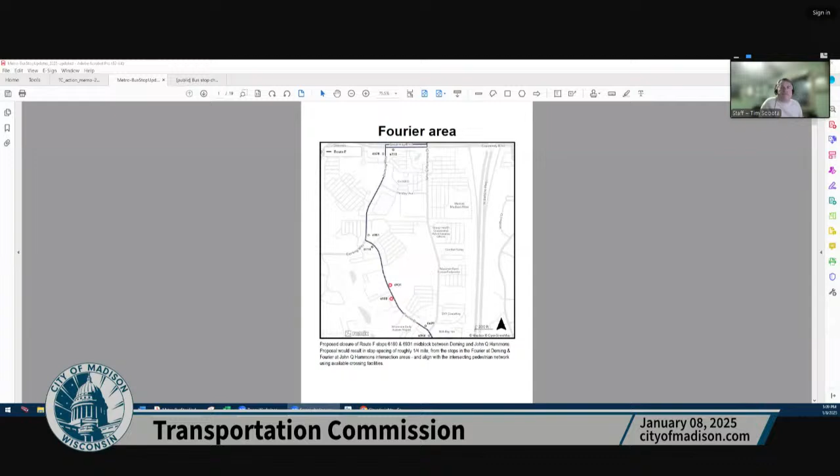So if I am now sharing a screen, just as confirmation... it's really small, Tim. Yeah, if you can do full screen instead of showing, because we see all the border of your computer screen. All right, I'll try one more time. Yeah, it's really tiny, very hard to see. Let me try one thing. I'm sorry, bear with me here. No problem, just going to do some internal rearranging on my screen.

All right, if I've swapped that, bear with me here. Is this getting any better? No, I think what you want is the slideshow option. Thank you, I think it's on the bottom. Not sure, but... oh, on the Zoom itself? Yeah. Thanks for the tips, Robbie. Thank you.

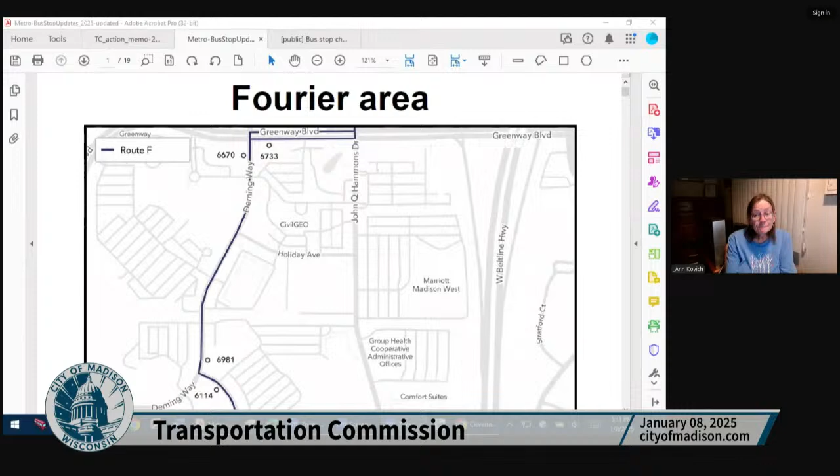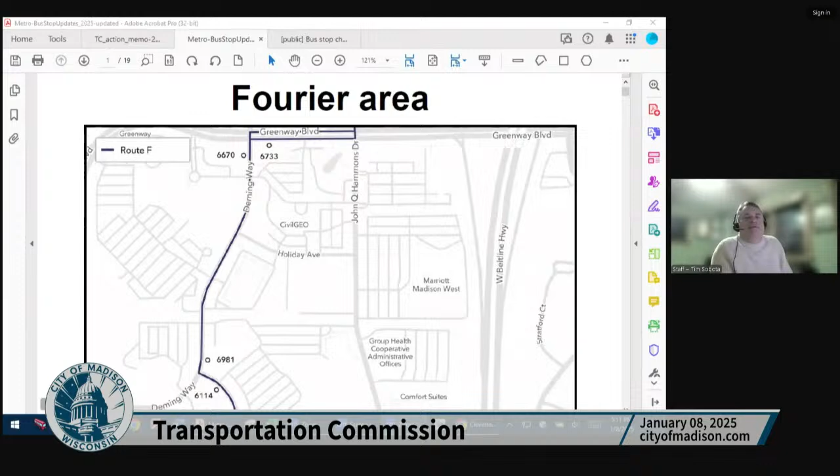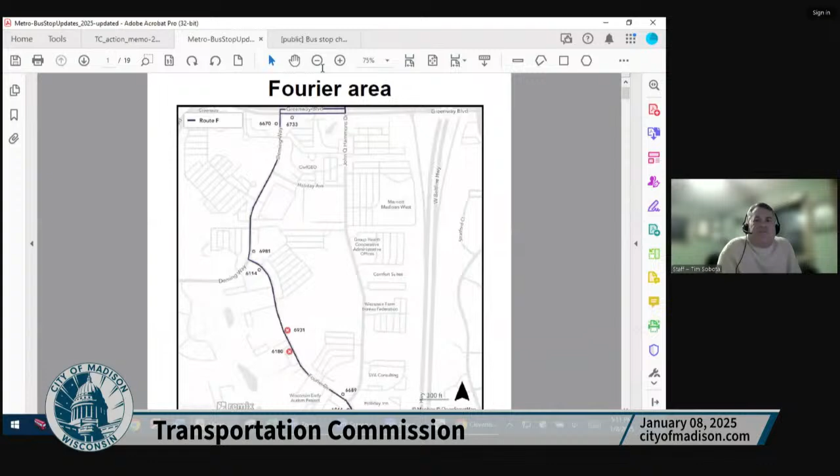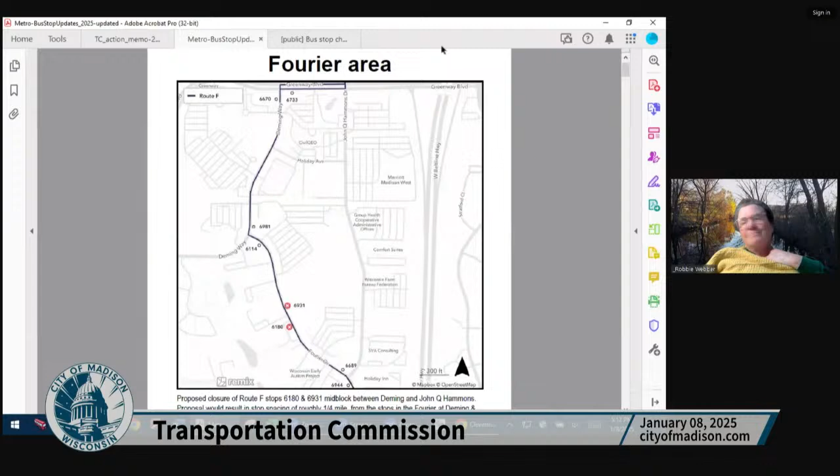Getting that. Now it's too big. All right, so if I back up a little bit, get this out of the way. Is this closer? Absent the stuff on the side and the top, is this going to be good enough for government work? I apologize. Yeah, it's just much more useful for presenters if they present just the slides and not their whole desktop. Understood, yeah. And this is sharing the screen. I've got two monitors here, but I apologize.

So I guess what I'll be doing is going through these overview maps from the packet. Starting on the far west side, this is Route F in the Old Sauk Trails Business Park. On Fourier Drive specifically, there was historically a pair of stops between the Deming Way and John Q. Hammonds intersections, with undeveloped land to the right and some single-story buildings to the left. The proposal is to eliminate those existing stops in the middle of the block that don't have an accessible pedestrian crossing between them, while maintaining the existing wheelchair-accessible bus stops with accessible curb ramps at the John Q. Hammonds and Deming Way intersections.

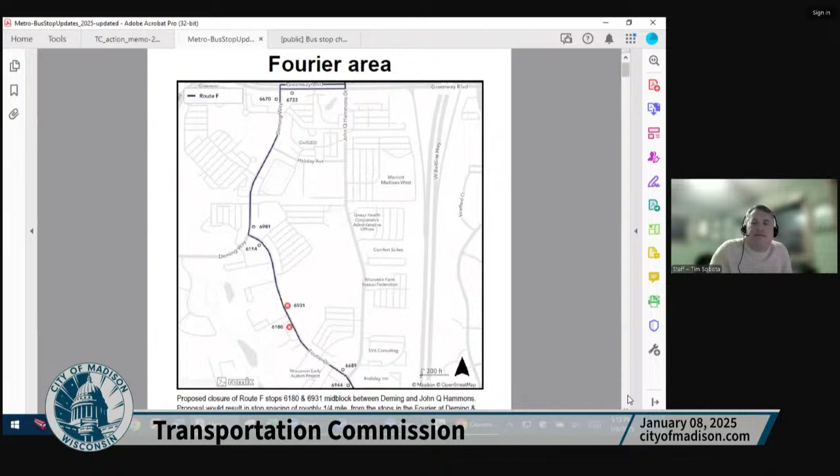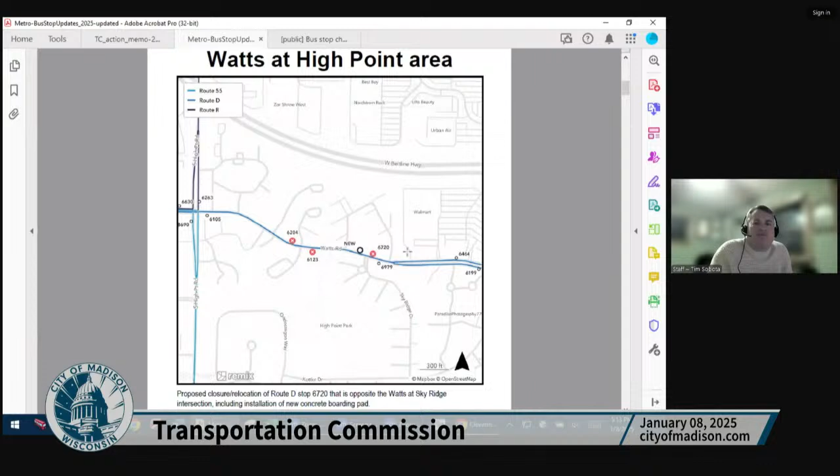I will proceed forward unless I hear otherwise. This is out in the Watts at High Point area, two different things. First, there's a pair of stops at the intersection of private driveways proposed for elimination, mainly because there are no existing curb ramps or marked crosswalk across the 4 lanes of traffic there. The other change is taking an existing bus stop immediately adjacent to a curb ramp and moving it a bus length beyond that curb ramp and crosswalk, to get the bus out of the crosswalk and open up better visibility at that pedestrian crossing where a stopped bus would otherwise obstruct visibility of the crosswalk or vehicles driving in either direction.

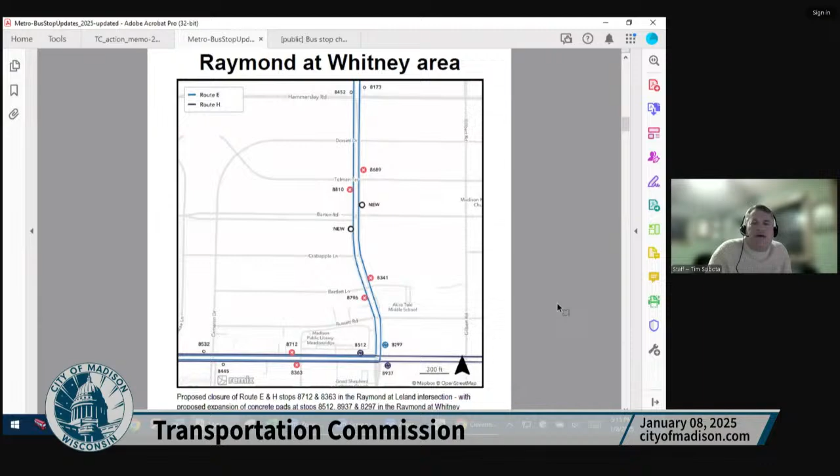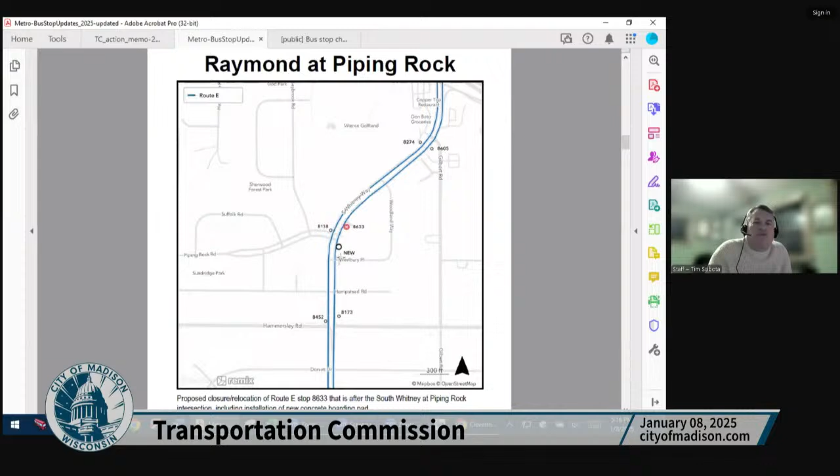At Raymond and Piping Rock, there's an existing stop north of the Piping Rock Road intersection, but it's right on the curve. It's somewhat of a blind bus stop, where the bus stops curbside while traffic is coming around that corner. From a safety perspective, we're proposing to move it before the Piping Rock intersection, about 20 feet before a pedestrian crossing there, setting it back from the crosswalk for visibility, while putting it where oncoming traffic will have a better view of the bus signaling to pull curbside to load and unload.

Reetz Road is somewhat similar to Whitney Way. Here's Raymond Road to the south and Hammersley Road to the north. With 2 sets of stops currently, we're proposing to realign those into a single location midway between Raymond and Hammersley, at the Knox Lane intersection.

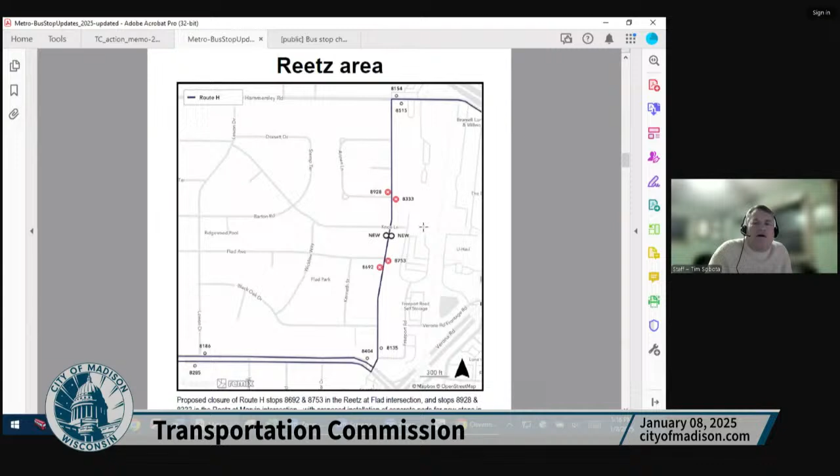Knox continues to provide westerly access into the neighborhood. There are no streets to the east of Reetz into the back of the Home Depot area there.

In the Allied Drive area, proposing to put the Route D stops on the side streets of Allied Drive, creating a new stop opposite the one on Lovell, and putting two new stops on Jenewein just immediately east of Allied Drive. That would eliminate the stops on Allied Drive, where the bus currently stops between the curb and a center median, blocking the directional travel lane. Moving those onto the side streets gets the buses off Allied Drive itself, where they're not impacting traffic and visibility.

The other one is kind of a private development change, but it is going in from an illustrative point: the McDonald's at the corner of Red Arrow and the Verona Road Frontage Road is reconstructing their driveway approaches, which will impact the existing stop on Red Arrow. But they're closing the driveway on the frontage road, which created an opportunity to put a bus stop there and also get a pad in for a potential shelter installation in that piece of right-of-way that will be reconstructed from driveway approach into standard sidewalk and terrace as part of that private development contract.

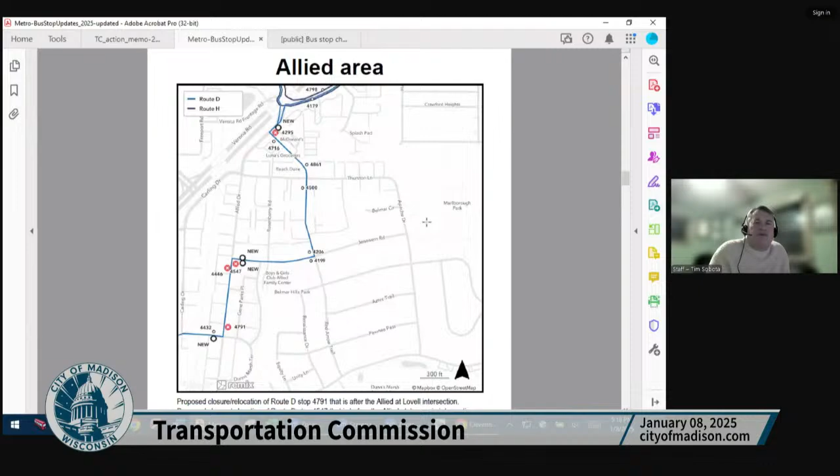Mineral Point near Speedway — this is a bus stop spacing proposal. This is the Glenway signalized intersection right here, and Westmorland Boulevard is the crosswalk by the Midtown Police Station. The proposal is to eliminate the stops the short block east at the Toepfer intersection, so spacing would go from Glenway down to Westmorland and so on.

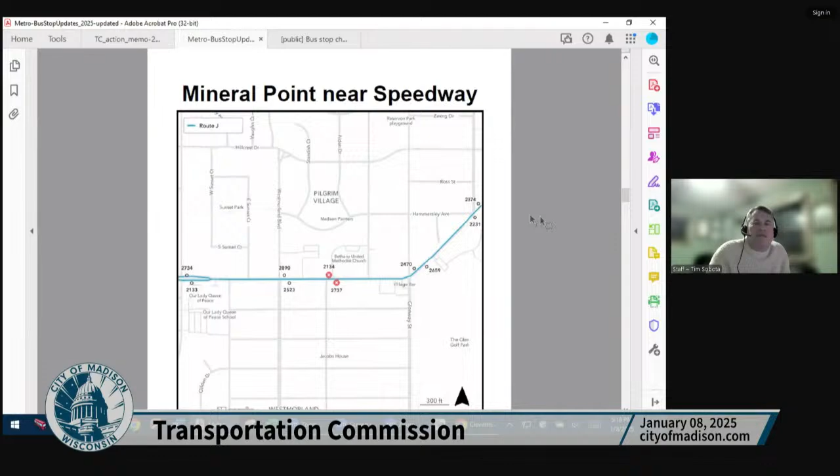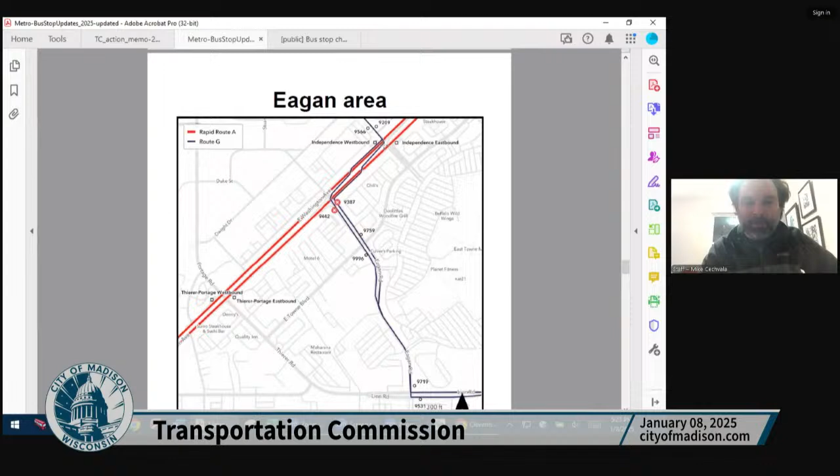With BRT construction and transit network redesign, these were always intended to be temporary. Before BRT, we did not have a traffic signal at Independence, so to accommodate transfers between the G and the A, we had to have that stop down at Eagan. But now that the signal's in, it's not really needed for that, and Route A doesn't stop there anymore, so it's not serving its purpose anymore. Sorry, I just thought I'd add that detail. Thank you.

The next series are related to Route B in North Madison. There is a new proposed overhead charger looking to be installed on the north side of Northport, the westbound travel side of the road west of Kennedy. Currently, Route B goes clockwise, west on Troy, north through Central Wisconsin Center, and east on Northport. If that overhead charger goes in there, that would require Route B to go in the opposite direction, westbound on Northport, around Central Wisconsin Center, and east on Troy. This is illustrating where that overhead charger with a bus stop would be planned for the B going westbound.

The next stop anticipated is on Knutson, across from the entrance of Central Wisconsin Center, proposed for installation with the city's Knutson project. Another stop is on Green Avenue, generally opposite the second entrance to Central Wisconsin Center. Proceeding from there, the stop currently opposite the state of Wisconsin facility, which does not have pedestrian access in that drive aisle, is relocated to the south side of the road where the bus would stop curbside at their entrance where there is pedestrian access into the facility. From there, proceeding east, the stop by Troy Gardens would be kitty corner across the way.

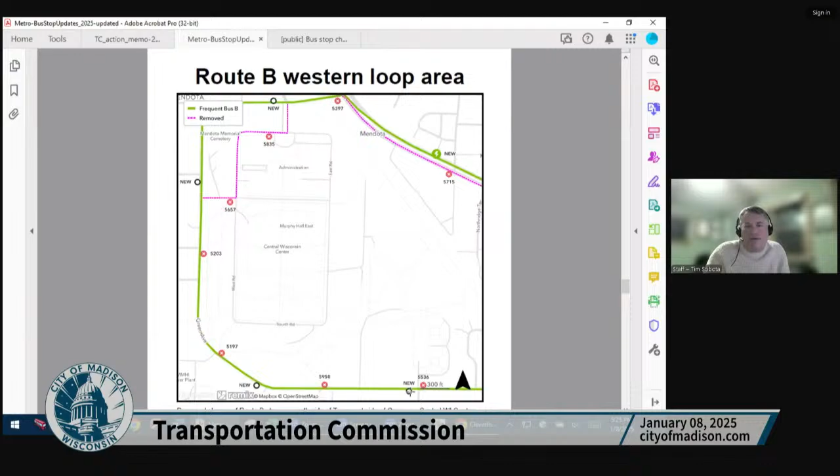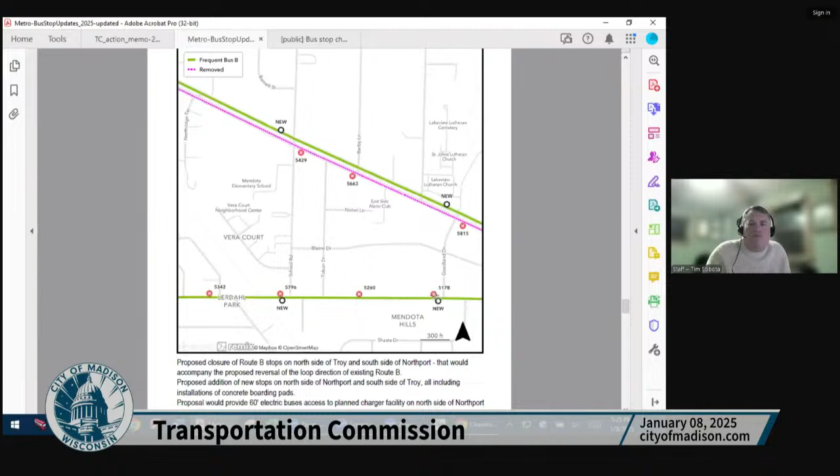Scrolling down, it gets bifurcated, but again, if the B is going westbound, this is Goodland Drive, and this would go kitty corner across the way. The stop at Barby would not be maintained, but there would be a corresponding stop kitty corner at School Road at the new traffic signal. Coming eastbound, the stop west of the railroad tracks would not be maintained, but the stop at School Road, just east of the viaduct, would be moved across the street. The mid-block stop would not be maintained, but the Goodland one would be replicated on the south side of the road from the north side of the road.

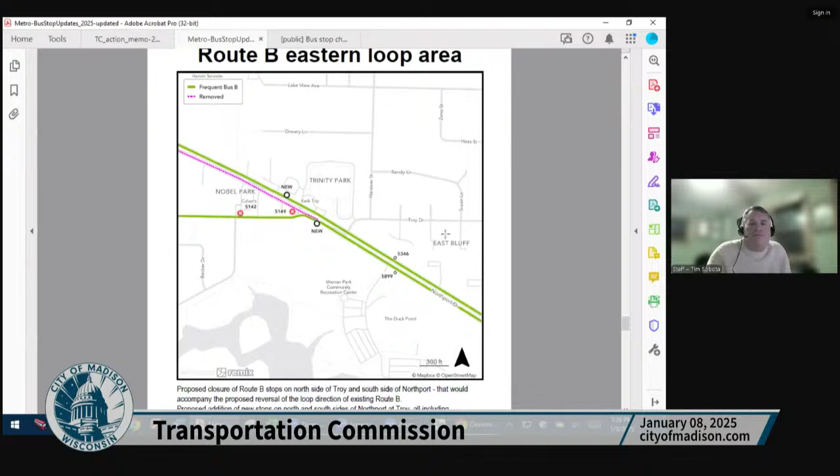Getting into the Northport end of the Troy Loop, westbound, there'd be the stop on Northport westbound after Troy Drive. The stop on the south side of the road by the gas station moves up here. And the particular stop down by the Culver's on Troy, west of that area, ends up over on Northport. So when that bus is coming east on Troy and turns right, it would stop curbside here. The existing stops at the Warner Park Community Center would remain as part of that two-way section of Route B.

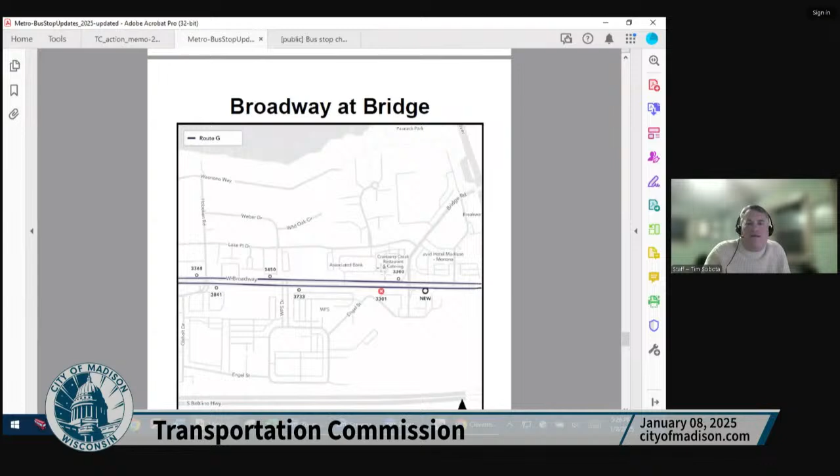Now getting into the final section, these are bus stops in Southeast, predominantly related to the city of Monona joining the system coming March. The first one we are coordinating with the city of Monona is a request to move the bus stop on Broadway from before the Bridge Road intersection signal area to beyond that signal, a typical far side orientation for both directions.

Route G currently operates along Broadway and up and down Monona, but that has historically been closed door service. With the new partnership with the city of Monona, we are looking to add new curbside stops for Route G in the Falcon Circle area where there's a pedestrian crossing of Broadway. Adding new stops for Route G, and the light blue line being the new Route 38, this is at the Broadway and Monona intersection. The grocery store is down in this quadrant. New Route 38 stops are going to be on Broadway east of there by the signalized crossing.

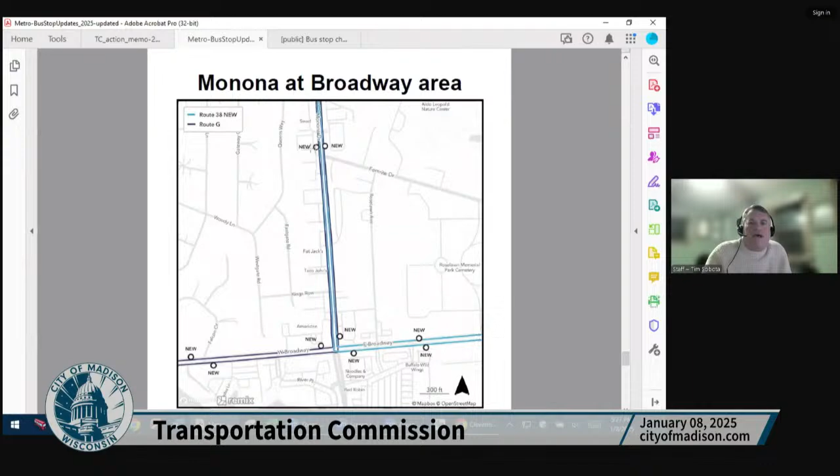Proceeding up Monona Drive, Route G would have new stops at the Femrite Drive intersection and pedestrian crossing area.

Continuing up Monona Drive, Route G going north and south would have new stops beyond the signal at Dean Avenue in each direction. Route 38 would have a new bus stop off of Dean on its one-way loop through this area. This is Route G only, and Route L is on Monona Drive north of Flom Road, near the La Follette High School area.

We're setting up a new series of stops at the signalized intersection crosswalk area by the Walgreens, which would replace the existing stops just east of there beyond the city of Monona limits in the city of Madison. The existing stops at La Follette High School and Groveland would be maintained, but the next set of stops for the G and L would be on Monona Drive after the Flom and Nichols signalized intersection area.

Continuing up Monona Drive, this is just Route L that goes north-south, and Route 38 comes in at Dean. Correcting myself on the earlier signal - that one down at the southern end of Monona Drive is Owen, not Dean. Apologies.

So we are now back north of Flom Road, with Buckeye Road off the top of the page. Route L going north and south would share a pair of stops with Route 38 that goes on and off of Dean, north of Dean Avenue - that's a signalized intersection. A new pair of stops would be added north of the Cold Spring Avenue intersection, by Monona Grove High School.

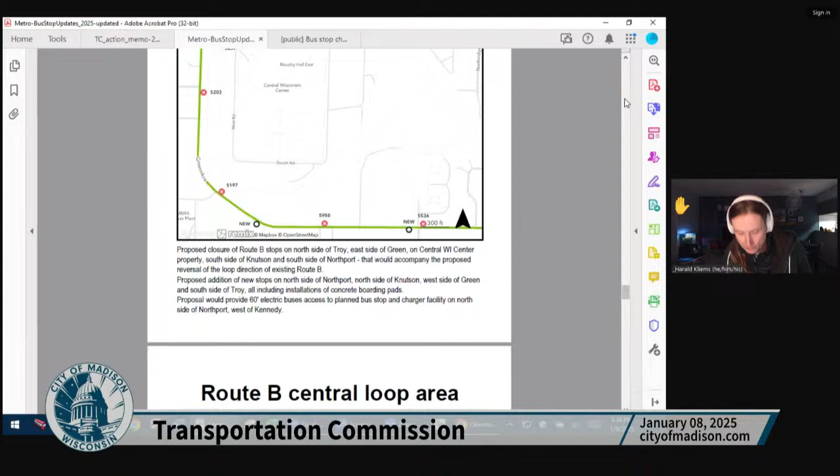I have a few specific questions about the stops and some larger ones too. For the Franklin and Regent one, I think you mentioned part of that is pedestrian network connectivity. One note is that some of the roads like Shepherd, Ridge, and Stevens don't have sidewalks in that area - did you take that into account?

Yes, that is something Metro Transit has been working with city engineering on, to look at the ability for a future city project to consider a sidewalk along Ridge Street leading up to the new signalized crossing at University and Ridge. But the existing stops on Kendall have sidewalk on both sides of the road - those are wheelchair accessible stops on both sides. Franklin has sidewalk on both sides too, and those are accessible bus stops.

So to the extent Ridge and Shepherd do not have sidewalks, that's where the city is currently using the edge of the pavement as the sidewalk - walking on the side of the pavement as opposed to a grade-separated, curb-separated facility. Right, okay, I'm glad it's on the radar, hopefully we can get sidewalks on those streets. I don't think it really matters depending on the stop locations because you have to walk on the sidewalkless street either way. Okay, good.

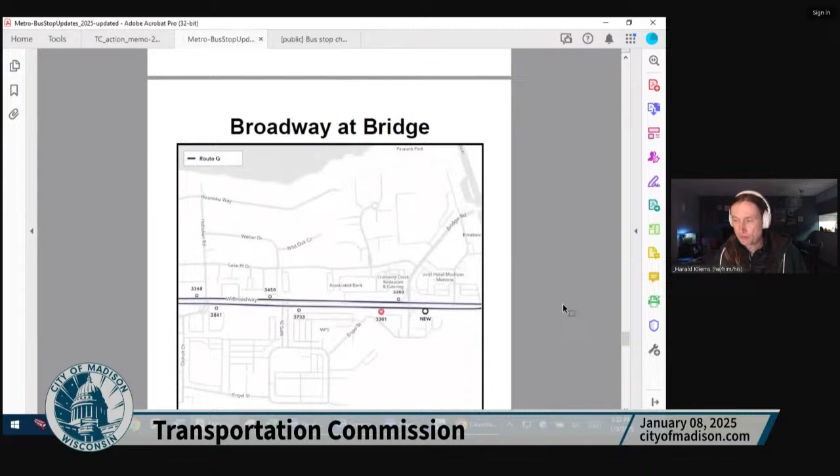The stops along Broadway in Monona - did you make sure the pedestrian facilities are well aligned with the proposed stop locations so people can cross? Yeah, so Broadway and Bridge is a signalized intersection with signalized crosswalks. Falcon Circle is a marked crosswalk - I forget if they have a flashing beacon there, or if it's just curb ramps and a marked crosswalk. Same thing over on Broadway, a signalized crosswalk just before the cemetery and the Ahuska Park area.

I guess maybe making sure Monona is aware - on Broadway, if you don't have a signalized crossing and you don't have an RRFB, it's probably not great for crossing. So maybe Monona, or I guess it's a county highway if I'm not mistaken, can prioritize getting some RRFBs in those locations. Great.

Some overall questions, maybe in line with a public comment that came by email - can you explain a bit? People may wonder, okay, you're closing stops to make the system more efficient with consistent spacing so the bus doesn't stop every little block. Some people may say, well, if nobody uses those stops, the bus rarely has to stop there anyway, so why not just keep them open? Can you explain that?

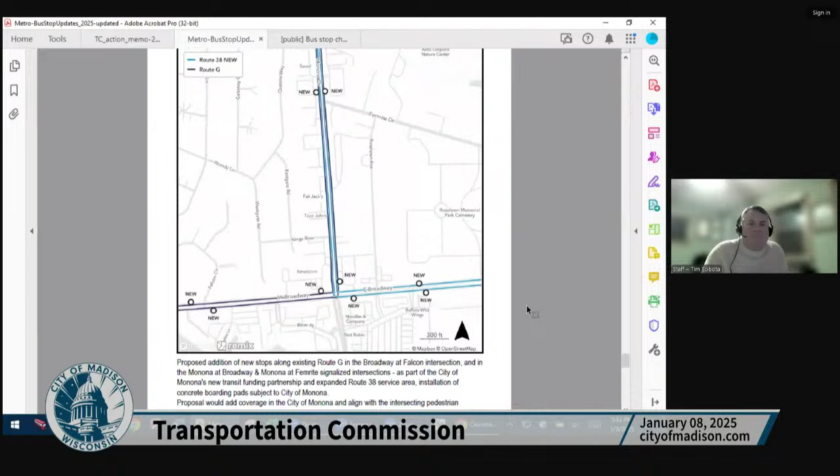I think part of the reason is the presence of stops, with the city of Madison's historic direction to Metro Transit to make all bus stops wheelchair accessible with a boarding surface. The corresponding requirement implies removal of snow in the winter, which is a capital cost and an ongoing operating cost for those surfaces and snow removal.

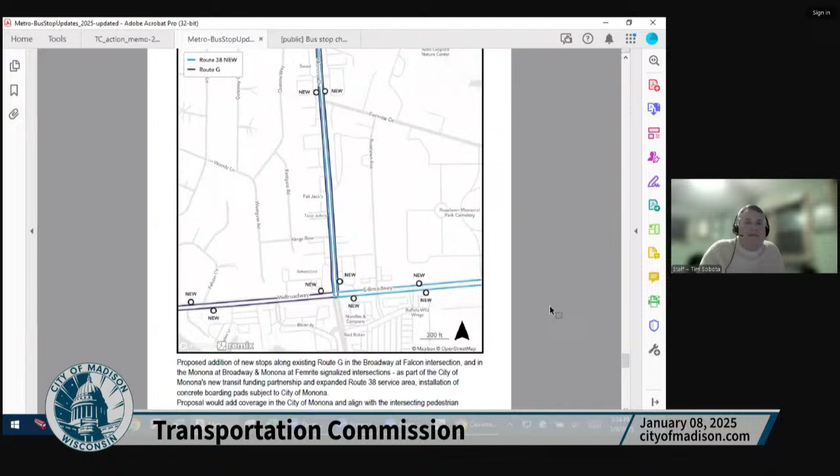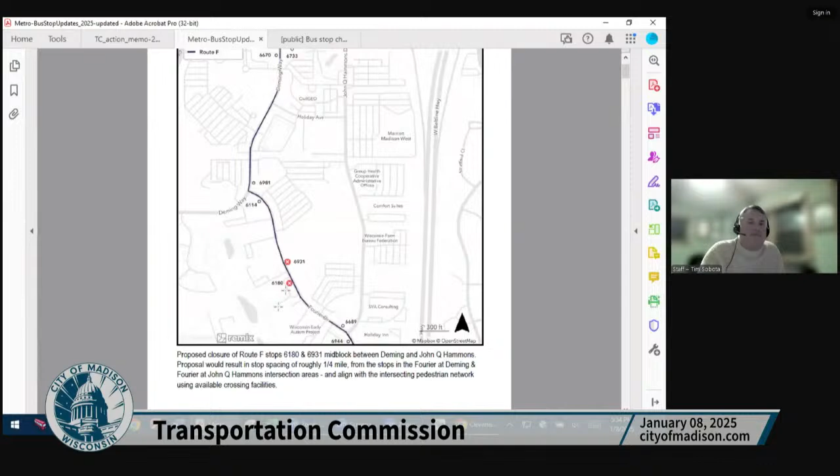And so that is something the city is looking to pay close attention to as far as where investments are being made and what investments are required once those capital investments are made. For example, regarding the Fourier area, that's one where it would not only be capital project costs for boarding pads, but capital projects for curb ramps, pavement marking, and whether you'd need a refuge island in the center for traffic engineering. So a lot of things would go into creating a fully accessible, usable pair of bus stops at a mid-block location that does not currently have pedestrian crossing facilities. So that goes into the thinking in this area.

Relative to ridership as well, Metro is starting to look at our new APC data at a stop level basis. This is not a significantly high level of ridership, in part due to the undeveloped land to the west and the low density facilities on the west side of the road. It's mid-block, so there's not cross streets that people are walking to those stops except from the undeveloped land or low density area. The stops down at these intersections have greater ridership because there's a walk shed down Deming away from the route, up John Q. Hammonds away from the route.

Okay, thanks, that is very helpful. And then a little bit, can you talk about the overall process? I think we've had a couple of these pretty long lists of bus stop changes, some associated with network redesign, some associated with BRT opening. Do you have a sense, is this going to keep going? Are we going to have another list of 50 stops a couple months from now? Or are we now at a point where we have this kind of figured out, we've assessed all the stops?

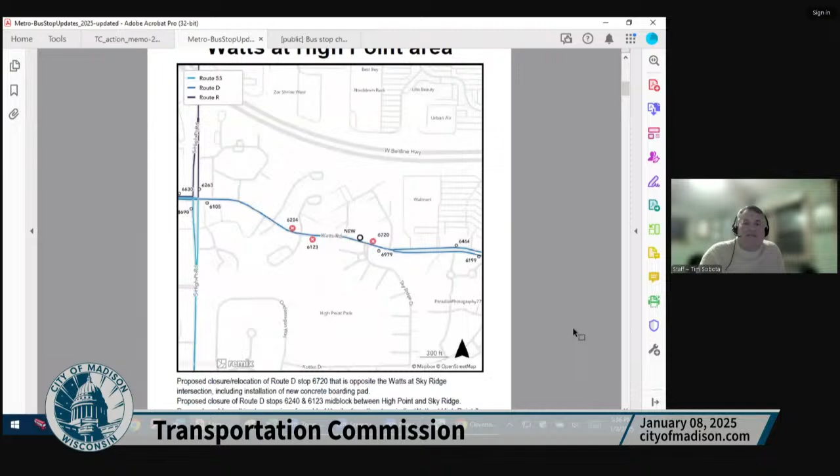So it would be my reaction that historically lists were much longer due to route network change, due to finding the most accessible location to create an accessible bus stop from an engineering and concrete installation perspective. As we're now going forward, I think it's going to be more of a maintenance issue.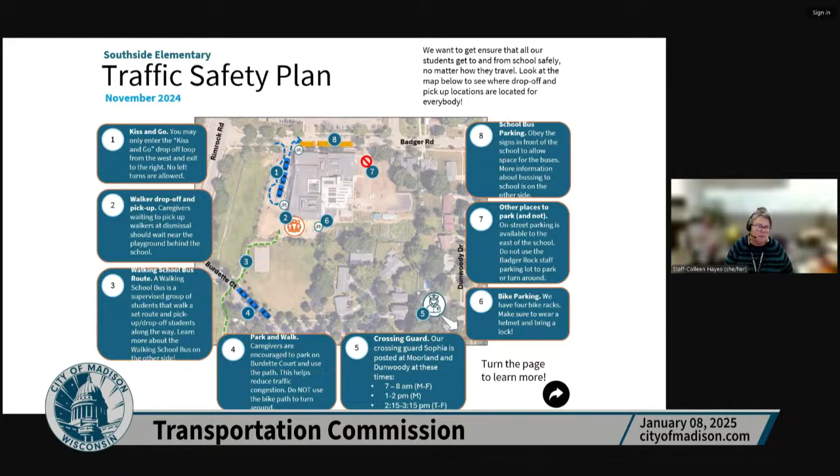And that would be the front of it. And then the back talks a little bit more about driving and parking, mostly for families and caregivers who are picking up and dropping off students, talking about street signs, no parking, no stopping, standing, or parking, and what all that means. Each school has a different system based on where it's located and what the traffic patterns are like around it.

That is pretty much it. I just have my information here. We have the Safe Routes to School website, which I also posted at the end. It's very much a work in progress. When we revamped our website a few months ago for traffic engineering, we included the Safe Routes to School plan, but we're still going to be adding to it as the project progresses.

So we actually are meeting again this week, getting back into it. A few of the members, including Sonia, are on vacation this month, so I think we'll really be jumping back in earnest probably at the end of this month.